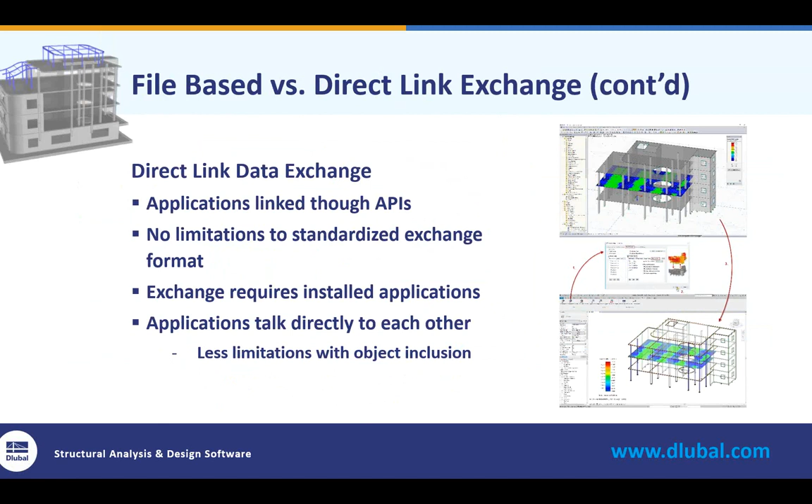With this option, the applications talk directly to each other, so we're going to see a lot less limitations with object inclusion. Back to my previous example with nonlinear supports and load combinations, we can now code in that option through the API interface to keep this information available, so whether we're round tripping between the programs, we'll never lose that information, even if it isn't necessarily included in the program we're interfacing with.

This leads us to the Dlubal Revit link and the import-export options available. I want to first note that this does utilize direct integration with API, so again we're going to see a lot less data loss than with a data file format. This option is included in RFEM. For those not familiar with our programs, we operate with an add-on module system. RFEM is our main program, providing us with a full analysis, and our add-on modules are utilized for design or dynamics. The import-export options with the Revit link are all included in the main program at no additional cost. The ability to integrate between the two programs is bidirectional, so we can update all or only part of the structure and continue to cycle between both programs continuously.

You can transfer the structure objects. From our dialog box to import/export in Revit directly, we have the ability to turn these objects on or off. We also have the ability for the transfer of loads and load combinations. In our next tab, the structural settings, you again see the ability to turn on and off those load cases, load combinations, and result combination options.

Lastly, with regards to result sharing, we have the ability to export the RFEM results to Revit. This includes both members and surfaces, so we're going to see information available for deformations, internal forces for those members and surfaces, and reinforcement, for example. We've had the ability for a while to transfer reinforcement of surfaces, whether that's walls, elevated slabs, or slab on grades for concrete design from RFEM to Revit.

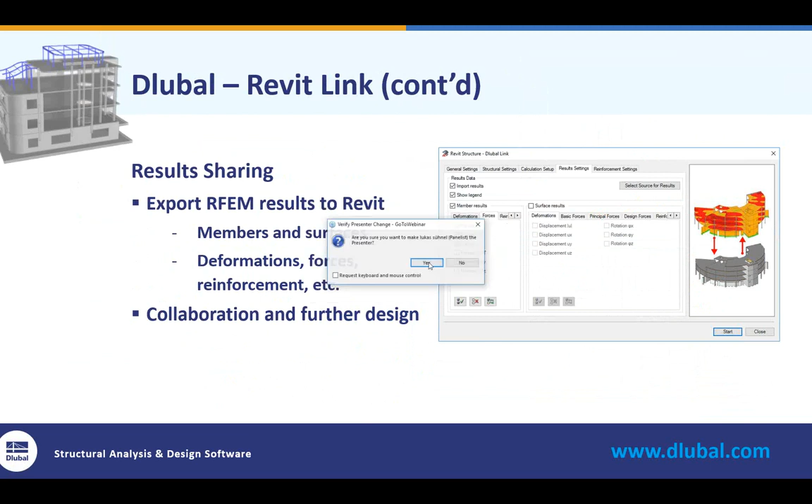Okay, thank you very much, Amy, for the introduction and the overview. I think you should be able to see my screen, and yeah, should be possible. Hello also from my side. In the next 45 minutes, I would like to show you the interface in action, and during that I would like to highlight a few different scenarios Amy already mentioned.

The first scenario will be one where we have a structure ready in Revit, and we want to export the data from Revit into an empty RFEM model. Therefore, I would like to show you now the Revit structure.

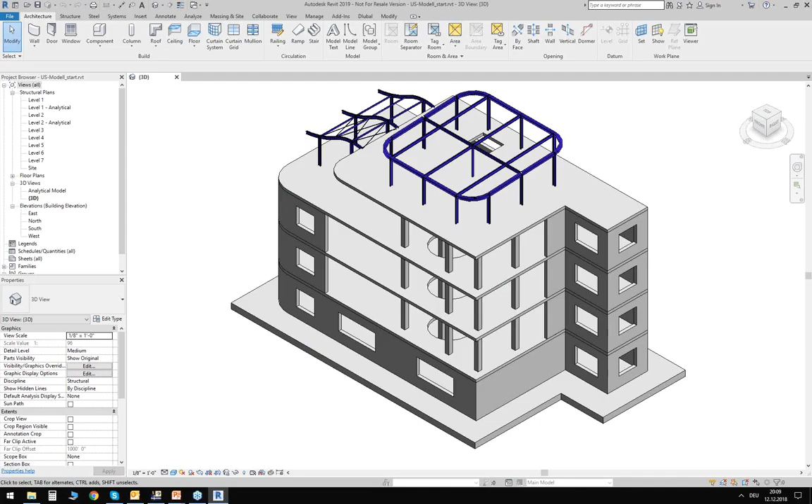Maybe as a side information, I'm using here Revit 2019. We do, however, support the interface down to Revit 2016.

Regarding the structure itself, I have here a mixed structure made of concrete and steel. I have a foundation slab, I have some walls with openings, I have curved walls, as you can see here in the corner. I have slabs with openings, concrete columns, and two steel constructions on top. The one on the left side has a curved roof shape, and the one on top has a sloped roof shape.

What you cannot see here right now in this Revit model, or what I did not include, is basically everything apart from the static relevant objects - things like heating, cooling, ventilation, electrical systems, or any kind of building services. You can have all those things inside the Revit model, of course, they're just not important when it's about showing the interface to RFEM. Important for the interface is the analytical model in Revit, and how you can get this analytical model I will show you now.

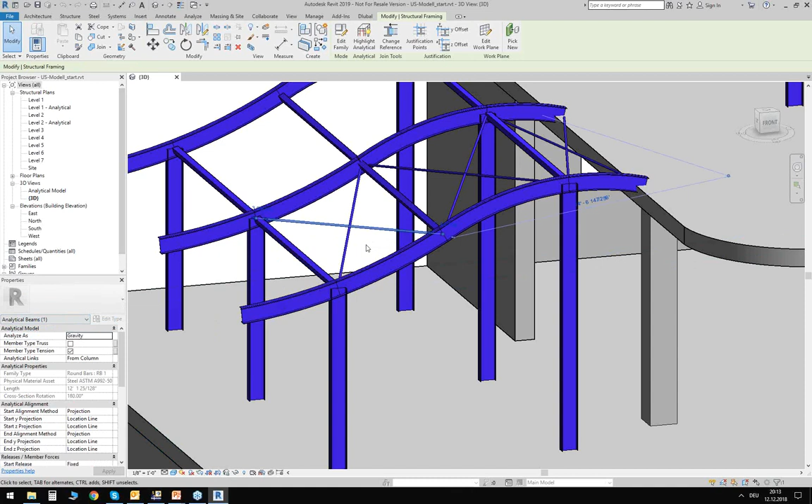So for example, we have here as well the analytical alignment of the member axis, but we also have an option to define member end releases in Revit. Additionally, and this is now a little bit Dlubal specific, it's Dlubal parameters that I activated in advance. I have here an option to define this analytical member as a member type truss. Or for my bracing here, I can define it as a member type tension. This is information which we can exchange with RFEM or with RSTAB, and I will explain it afterwards again.

Okay, so by activating the analytical model for each of those elements, you can create the global analytical model. And this you can also, of course, see in Revit. Revit has a predefined 3D view, which we can activate. So again, this is the analytical model. This is what we will export afterwards to RFEM. And you can see what I just mentioned. The foundation slab is now a 2D surface. Also, the members in general are now just 1D elements.

So in general, I think it's clear that when we export the analytical model, the geometry is quite clear. It's fixed, clearly defined by the length and the height of the elements. What's maybe not so clear is the exchange of information. And with information, I mean the exchange, for example, of the material names, of the cross-section names, and so on. I think in general, you can imagine that the material names in Revit are maybe different to the name of the material in RFEM. So how you write the name can be different.

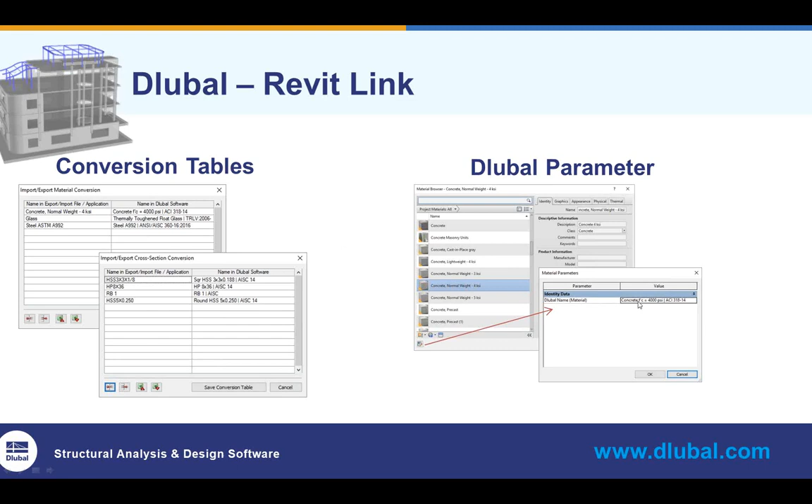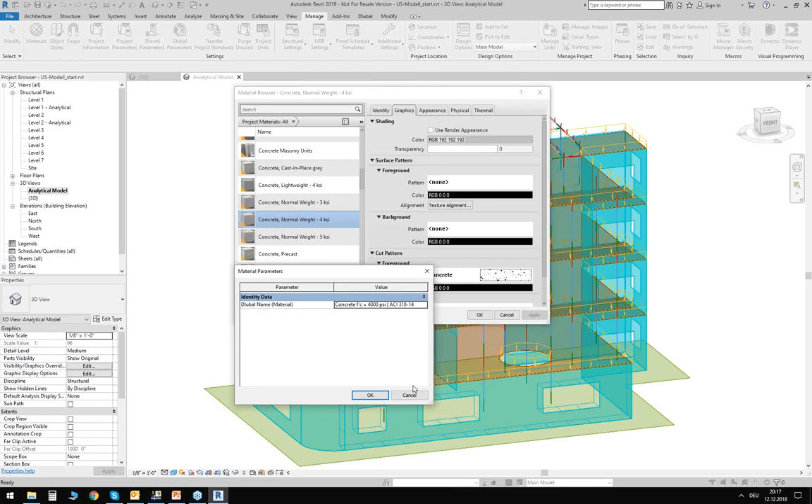The other possibility to link this information is via Dlubal parameters. So you can define directly in Revit the name of the material in Dlubal. This is also something which I can show you in my Revit model here, because I actually did it that way. As I just said, I'm using this material in my Revit model, and via these custom parameters in that window, I was able to enter the name of my Dlubal material. So instead of exporting this name to RFEM, we will export this name. And since this is the name of the material from the RFEM library, we will get the correct material parameters and the correct values for the design which we have to do afterwards.

Okay. Apart from that, we can also see some loads inside this analytical model. So we see here that there are some loads assigned to my members. So Revit gives me the possibility to define load cases, load combinations, and even loads. You can access this information via the Analyze tab, and you can click here on the load cases, and you can see we have here 4 load cases for the dead loads, live loads, wind loads, and snow loads.

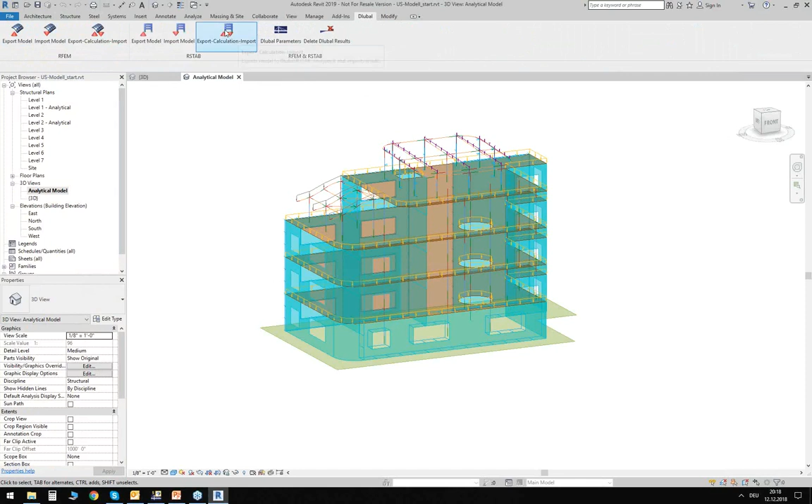And all this information I can now export to RFEM. And I think this is something we could do right now. So how can I do it? First of all, I will show you my empty RFEM. There's nothing inside. And I can start the export from Revit. So I have here a Dlubal tab. And I have here options to export and import between RFEM, export and import to RSTAB.

And here I have some additional buttons. Here, for example, the one which we call Dlubal parameters. This is what I just explained. We have parameters for the materials, for the cross sections, for these special member types. Here you can activate these parameters in Revit, so you can access them here in these windows.

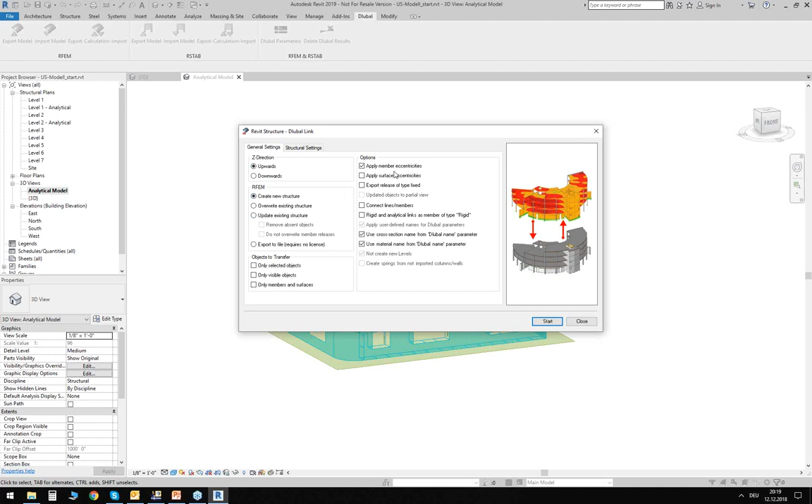So I want to export my model to RFEM. Therefore, I export this model. I can define some detailed settings for the export. I can define the Z direction of my RFEM model. It should go upwards. I want to create a new structure in RFEM. I want to apply some eccentricities that I have here inside my Revit model. And I also want to use these cross-section and material parameters that I just defined. Additional to that, I can also export my loads.

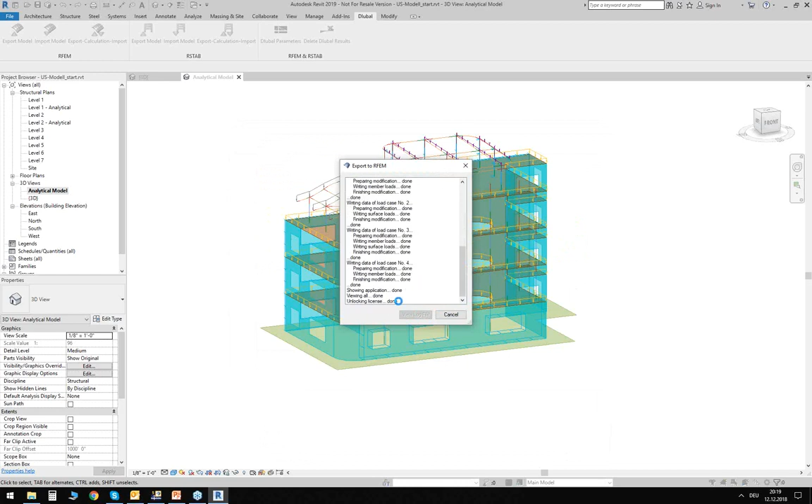I can run the export. And you will see that it's quite quick. Yeah, the export is already done. So I can close this window. I can open RFEM again. And you can see directly that the structure we receive here on this end looks quite similar to the one in Revit.

We have the foundation slab as a 2D surface, of course, including some supports. We have our walls with the openings. We have this curved wall here on the edge or in the corner. We have concrete columns. We have steel constructions here on top, the one on the left with the curved roof shape, the one on the top with the sloped roof shape. Yeah, looks quite good in general.

But if you exchange data, you always want to make sure that you exchanged the data correctly. So we should have a detailed look at this data. And there are different ways how to do it, and I would like to show one way: by using the display navigator here on the left side. And here I have an option to render my objects according to different colors. So for example, I can render my structure according to my materials. We haven't seen any difference now because it's basically the default rendering option.

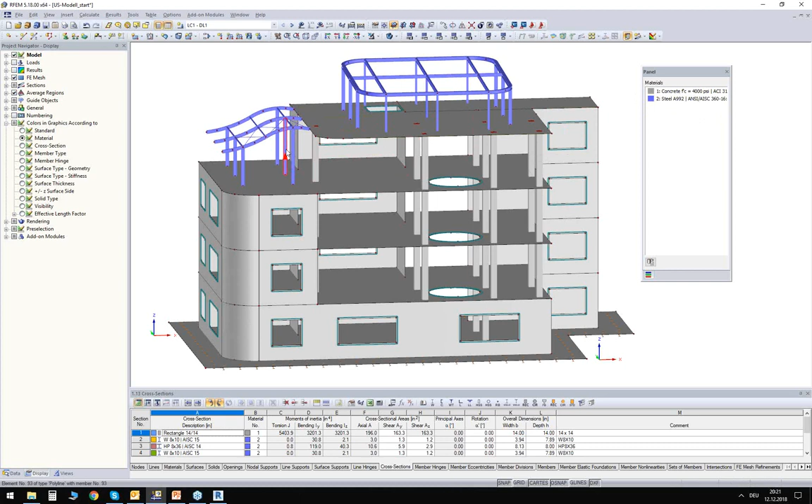What we can see here is that every gray element is basically made of concrete and every blue element is basically made of steel. We will see an effect if I change it to rendering according to cross sections. Yeah, thank you. We see here that the cross sections are now colored, and the color represents a specific cross section. So this allows us to get a nice overview about the structure and the exported sections from Revit.

We have further options here, for example, the member type. This is something I wanted to explain again. You can see here that we have different member types. We have member type beam, truss, and tension. And this is what I defined in Revit before. We said the coupling member should be a truss member. And we also said that this bracing should be a tension member.

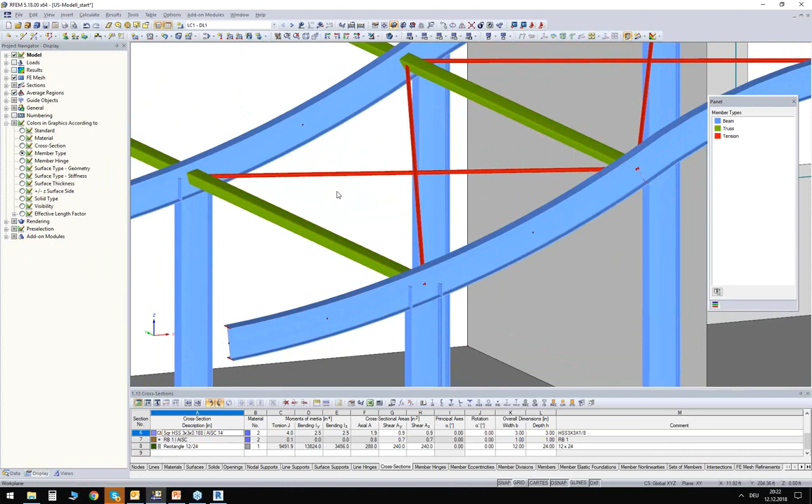And this is advanced information for RFEM. This basically means a truss member is a member with hinges at the beginning and the end, and a tension member is a truss member plus a nonlinearity assigned so that it should fail under compression. So this is additional or advanced information that you can exchange between Revit and RFEM, or Dlubal in general.

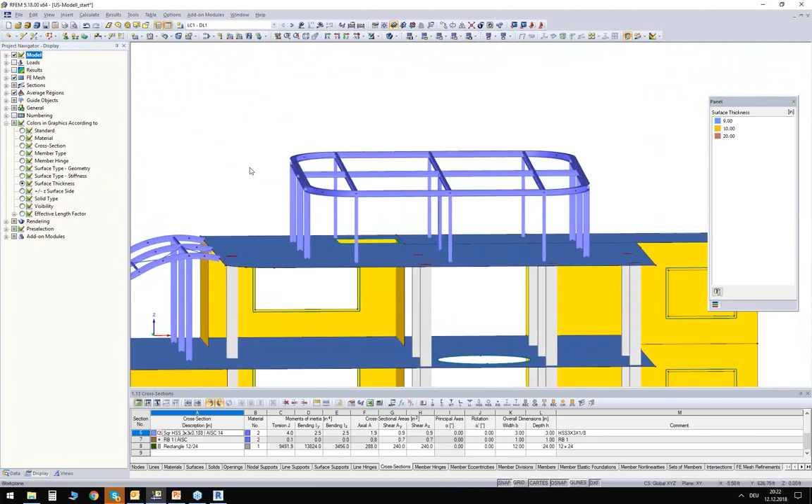Okay, there are further options, for example, the rendering according to surface thicknesses and so on. And there's one which I also want to show you. It's according to member hinges. What you can see here is that there's no color included in this graphic. That tells me that there is no hinge included. So I have no member hinges here in this structure.

What that means is that every connection here in the steel construction is a rigid connection. And as a structural engineer, this is something you want to avoid. And of course, we can add these member hinges here in RFEM as well. So what I'm going to do now is the following. I will define one type of member hinge. In that type, I want to release the rotations around the Y and the Z axis.

And now I can assign this member hinge graphically to my RFEM model. Assign graphically to members. The only thing I have to do here right now is selecting these members. Depending if I select the end or the start or the center of the beam, I will apply this member hinge to the end, start, or on both sides. Okay, let me just double check if I did it correctly. Yeah.

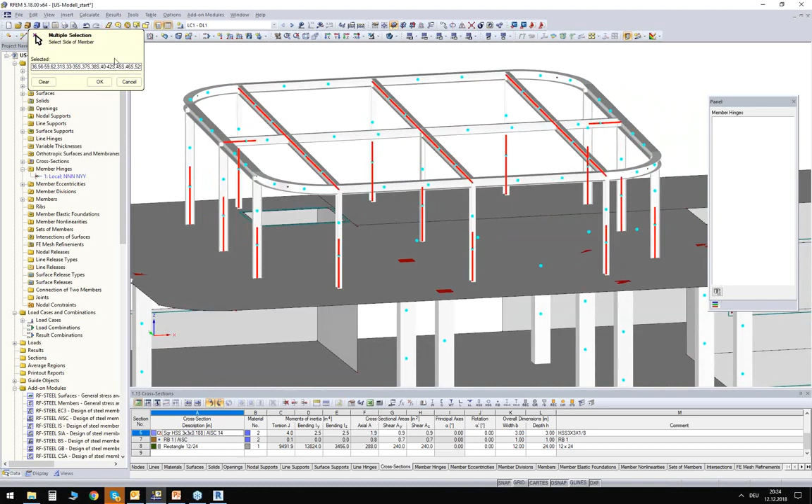I could even double check it by this graphic, which we have still activated. You can see now, I have one member hinge here, and the red color will show me on which side of the beam I defined it. Okay. So with the display navigator, we can double check, for example, the imported data. We assume the model data is now correct. So I want to continue with my loads.

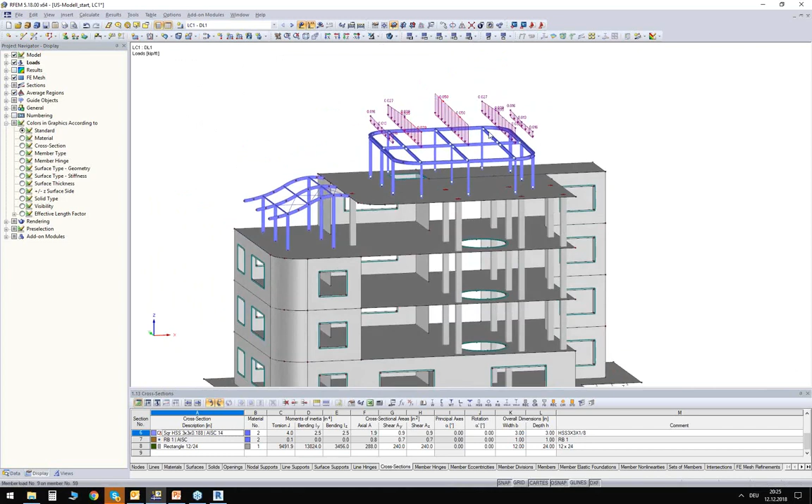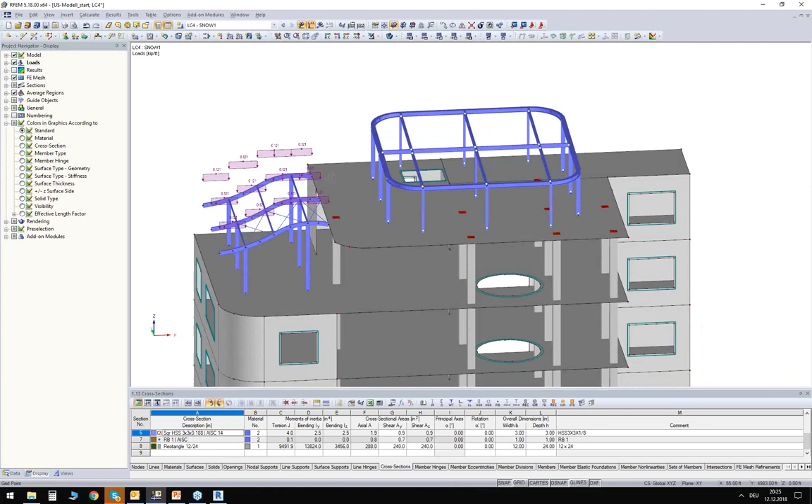I have here 4 load cases. These are the 4 load cases I expected to have because I exported them from Revit. And I can also take a detailed look. I have some dead loads, additional dead loads. In this load case, I have some live loads here on top of the slabs. I have some wind loads and also some snow loads. I can see directly that the person who created the loads in Revit forgot the snow loads, for example, here on this steel construction. Again, this is something I can, of course, also add in RFEM.

Therefore, I'm going to use a small generator. I will generate some loads from area loads on members via plane. So I'm defining the magnitude of these loads, 0.02 KSF. They should be related to the global projected area. And I can pick the corner nodes of my area where they should act. I will simplify it a little bit here for the presentation, just so we save a little bit of time. So I'm picking these corner nodes and I'm cutting a few edges, I know, but yeah, should be okay for now.

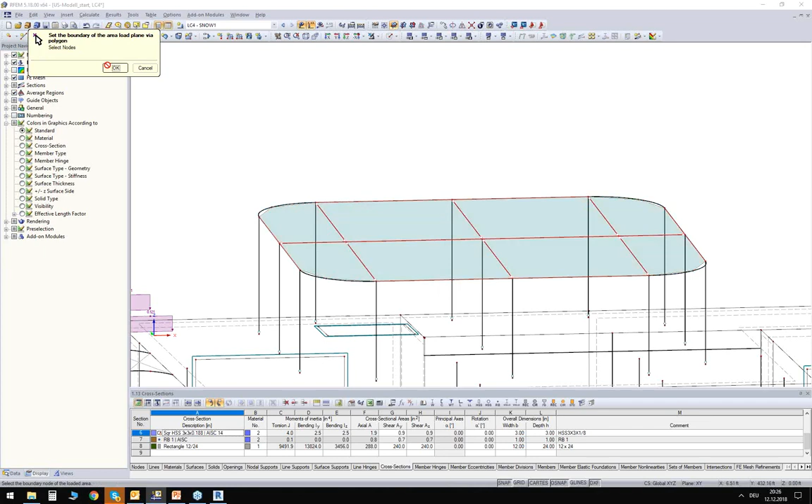I want to remove the influence from all horizontal members because I want the load to be applied only on the slope beams. Okay. So this is what I receive. After I did that, I can see my area load. I can also change the display and display it separately as member loads. The intelligence of that generated load is still active, as you can see. So it's still a generated load. And this is an advantage for something I will show you afterwards.

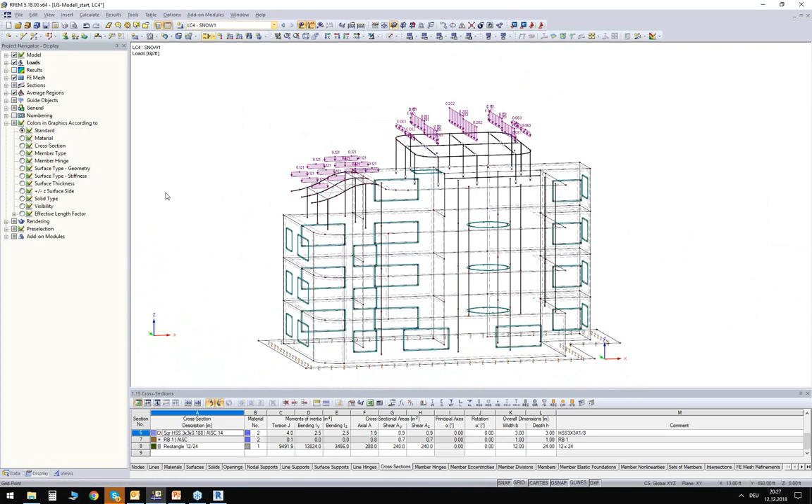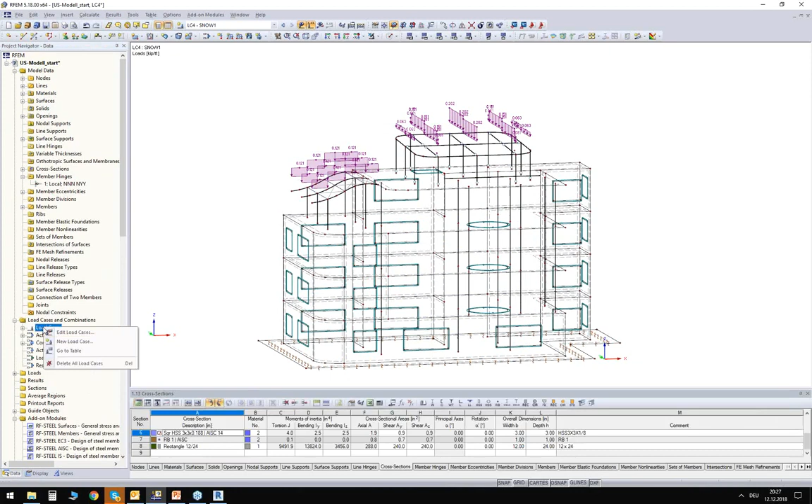Okay. I don't want to deal with the loads any longer. For now, it should be okay. So the next step would be the combination of these load cases. This is something I can do in RFEM as well. I go to my general data. I will enable the automatic combination of load cases according to the ASCE code, and yeah, create load combinations automatically. I want to control this automatic load combination a little bit. Therefore, I'm checking the related tables.

First of all, I want to make sure that the correct action category is used for every load case, which is the case here. In case we would have multiple load cases in the same action type, so in case we would have multiple wind load cases, for example, I could control here in that area that they should act simultaneously or alternatively or in groups or whatever.

Another important piece of information which we have to give to this automatic combination is according to which design situation it should create these combinations. So there is the LRFD section, the ASD section, extraordinary, structural integrity, and so on. And every design situation has its own rules for how you have to combine load cases, which you can see here. These are the rules according to the LRFD. These are the rules according to the ASD. You have different factors here and a different setup in general.

And depending which design situation you create here, you will have additional load combinations, of course. I want to save a little bit of time, so I'm deactivating the ASD combination. I only want to have combinations according to LRFD.

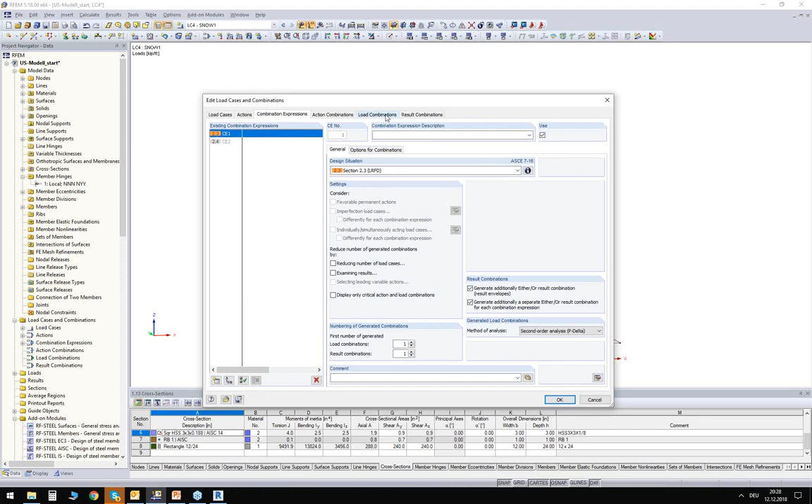I will create these combinations here. I can have a look at them again. I can see the factors, so I can control it or double check it. Additional to this, I get a result combination. A result combination is like an envelope for all load combinations. If you take a look at the results of a result combination, it will show you the maximum and the minimum and its related internal forces. Okay. You can switch between the load combinations via this drop-down menu.

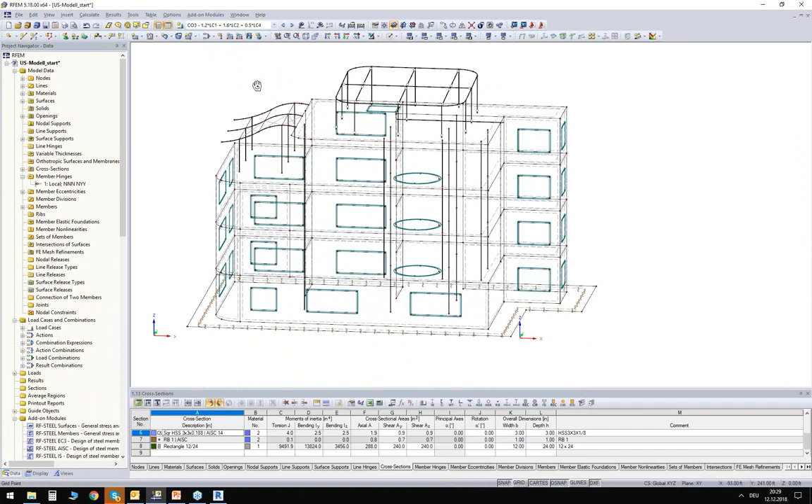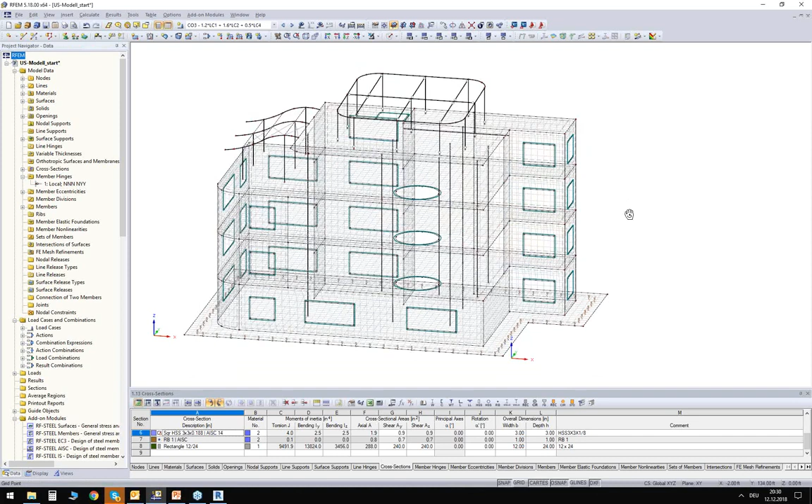So before we run the calculation, we should have at least a rough look at the finite element mesh. It's a finite element analysis here, so the finite element mesh has a huge effect. So what I will do is I go to my FE mesh settings and I will only define the target length of my finite elements. This is the most important information for now. I will regenerate the mesh and I can see the finite element mesh now.

In general, you could say it looks quite good. I mean, it's decent. There are some areas where it's maybe not so optimal. For example, here on the right side, where I have these openings, the windows inside, I have just two elements between the edge and the opening. This is not enough elements. So I want to optimize that area. Let's say just this area here. How can I do this?

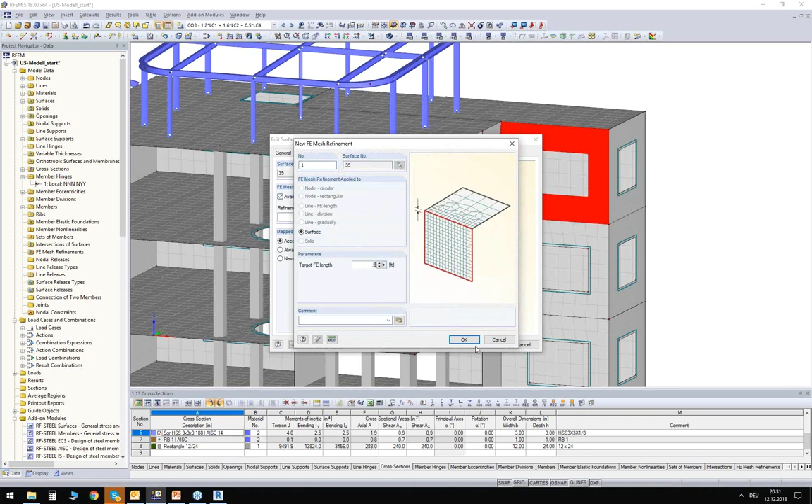I just double click on the surface. I can go to my FE mesh tab and activate a FE mesh refinement. The only info I have to give here is the target length of my finite elements in that area, maybe 0.5 foot. I accept and optimize that also on lines or on nodes. I will do it also for the node here. So around this node, I want to have an FE mesh refinement. I go to the tab, I activate the FE mesh refinement, and I can define additional information about the radius and the target length inside.

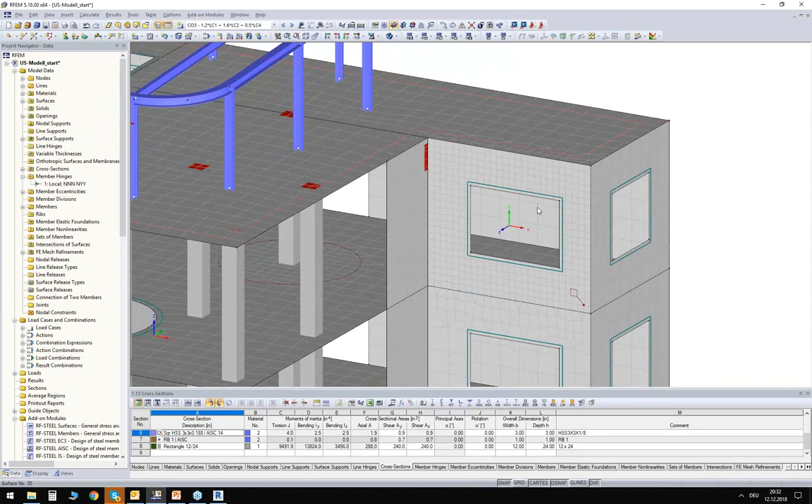Okay, we assume we optimized the FE mesh of the structure for every section. I will skip it here right now, and we regenerate the FE mesh. You can clearly see the effect now. So this is the global FE mesh. This is the refined FE mesh. You can see the effect as well here around the column. It was quite easy to change that.

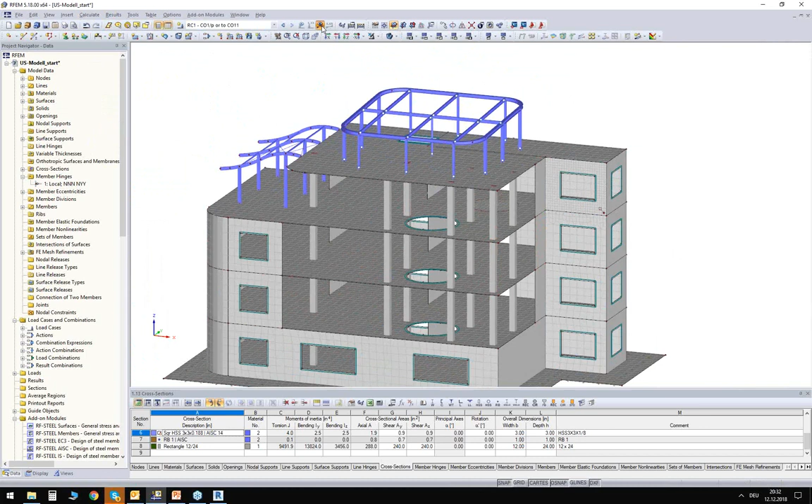Okay. So the next step is the calculation of the internal forces. I will do it by selecting my result combination here, and I will say, please show me the results of this result combination. I could have also done it in a different way. I could have clicked on the button calculate everything. But what does it mean? It will calculate also the results of my load cases. But I'm not really interested in the display of internal forces of my wind load case where there is no self-weight acting. So to save a little bit of time, I just clicked on the results of this result combination, and the program is intelligent enough to calculate only the required load combinations.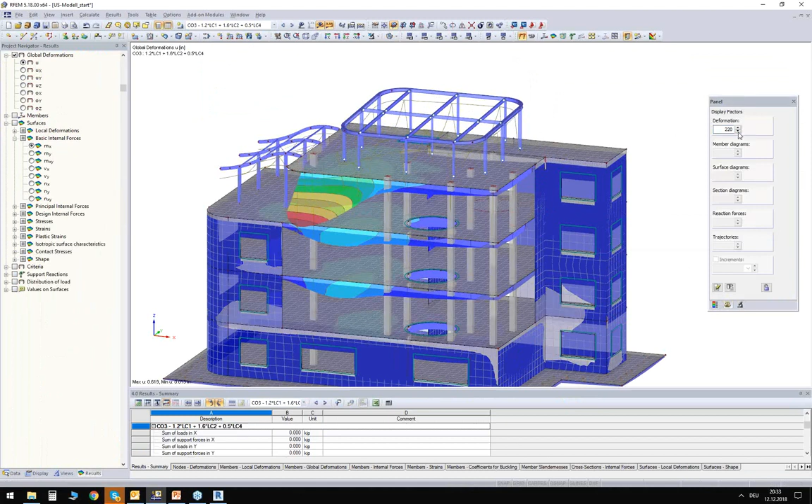Okay, we will see the results in a few seconds. And then we can continue with the design of the structure. For some reason, it takes a little bit longer than when I prepared it, but that's okay. Okay, the calculation finished, we will see the results in a second. And I can switch now again between my combinations and display for each combination my result. Let me decrease a little bit the display factor, otherwise it looks like the structure is failing.

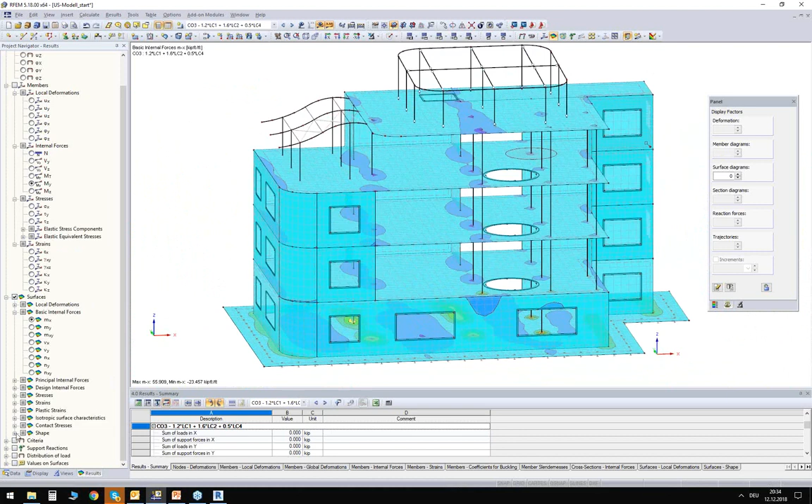On the left side, I have my result navigator now. I can switch between deformations or member internal forces. So for example, you can see really nicely that the axial force in the columns will be increased every time it intersects with a slab, of course. I can also display some bending moments, maybe to double check if the hinges I defined work correctly. I can, of course, also take a look at the results in my surfaces, maybe some bending moments in my surfaces, or even the contact stresses on the foundation plate on the bottom.

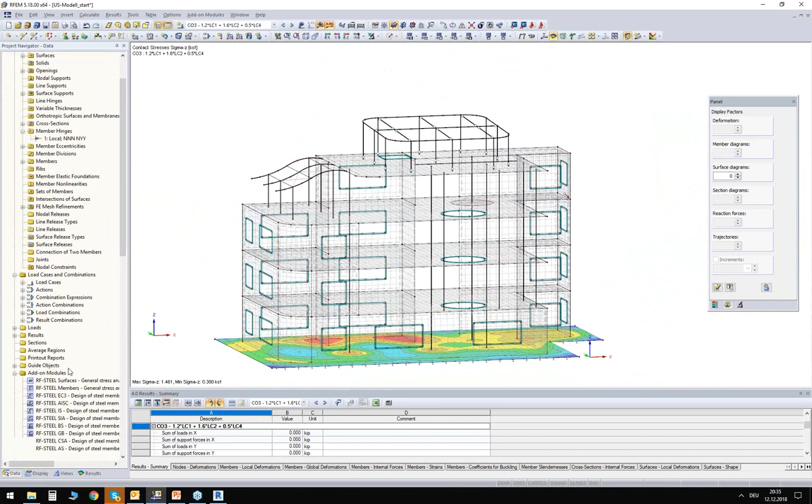You'll notice every module looks familiar, so if you can handle one module, you most likely can handle the others in general. What I have to do is select the members I want to design—here just this beam and this column. You can pick the code you want to design according to, and also the result combination.

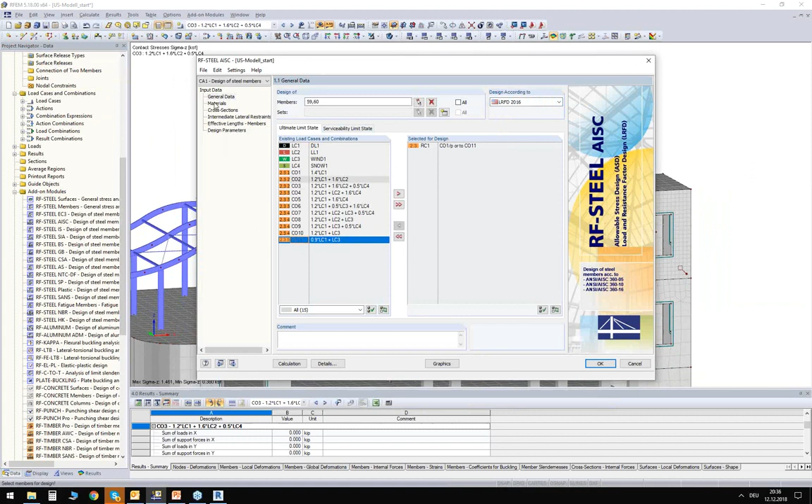You have additional windows to go through. Some give an overview of properties for materials or cross sections. Other windows deal with stability checks of the beams, so you can define intermediate lateral restraints, buckling lengths, and design parameters. I'll leave those values on default.

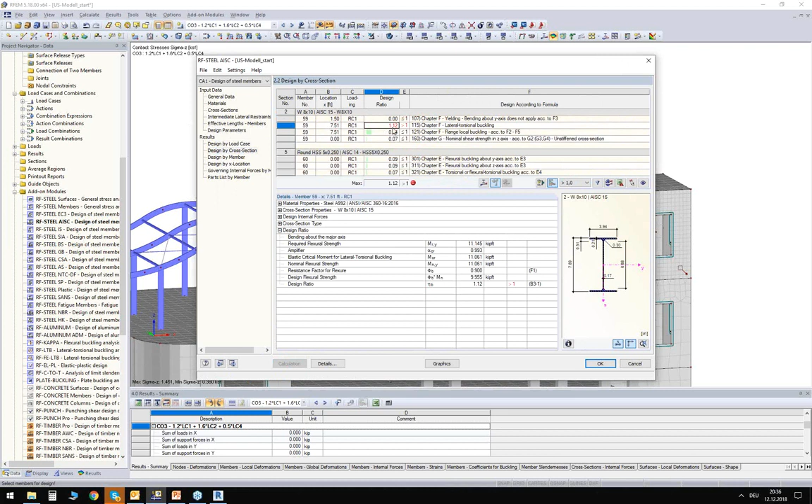I'll run the calculation and switch to my result table, design by cross section. What I see here is, for each cross section designed, the maximum checks. I notice the W section for the beam has a design ratio of about 1.12, higher than 1, which is not good. The design ratio of my column, on the other hand, is not even at 10%. So I have to optimize both cross sections somehow.

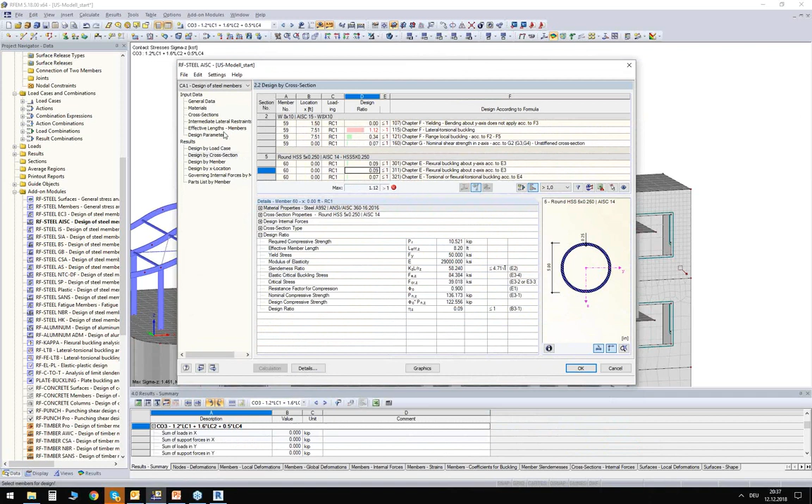I can do it the following way: go to the cross section window and let the module optimize the pipe section automatically from the current row. Current row basically means it will look for the best section in this list—the best section being where the design ratio is smaller than 1. The criteria for this optimization is actually the self-weight of the section.

Okay wait, I made a small mistake, sorry—import cross-section from RFEM, I changed it which I didn't want to. I want to optimize the cross-section, and I could in general do the same for the W section, but due to constructive reasons, I'm not able to change that section.

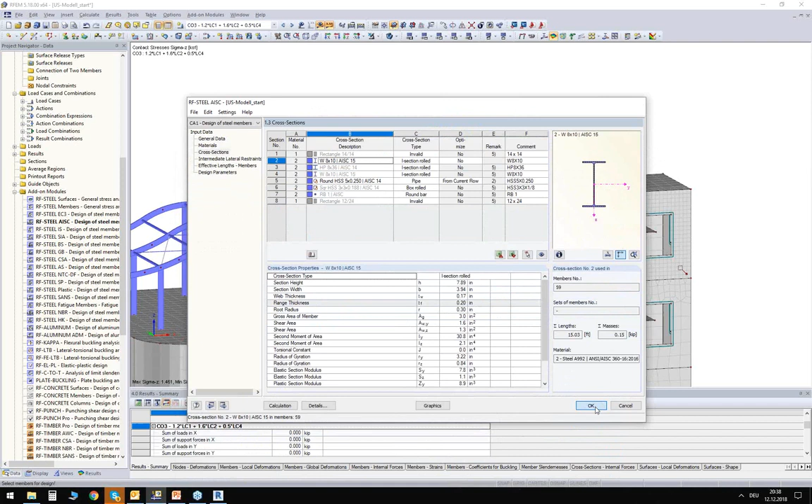So what I'm going to do is apply additional beams in my roof. I just select the beams and use drag and drop to copy them—it's a graphical tool to copy beams, really quick and easy. By defining additional beams, I will spread the load, and this is something I want to show.

If you remember, we defined this generated load where we specified the area it should act on. This load is intelligent enough to recognize these new members, and it will redistribute the area load to all beams now, all slope beams. This basically means the load on the beam we design will be reduced. So I go back to my module.

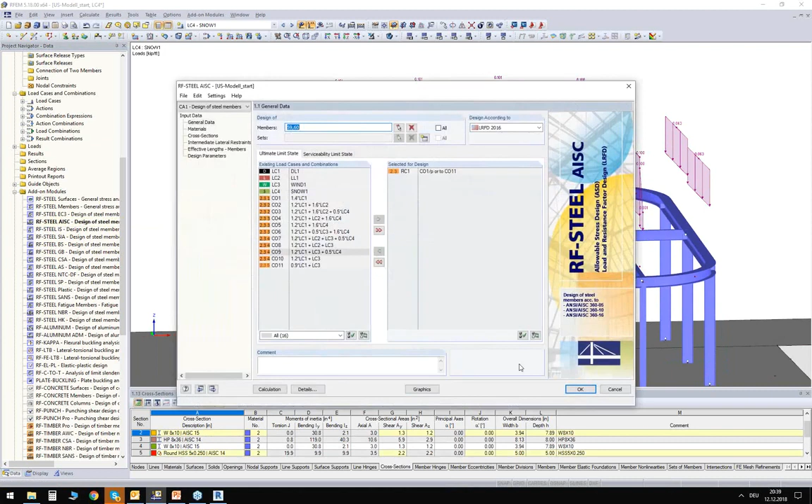I rerun the design—for the pipe section I'm using automatic optimization, and for this section I optimize the analytical structure in the background. I click calculate again. And of course I have to recalculate the internal forces now, simply because I changed the analytical model in the background—I added additional beams and redistributed my loads, so I have to rerun the analysis.

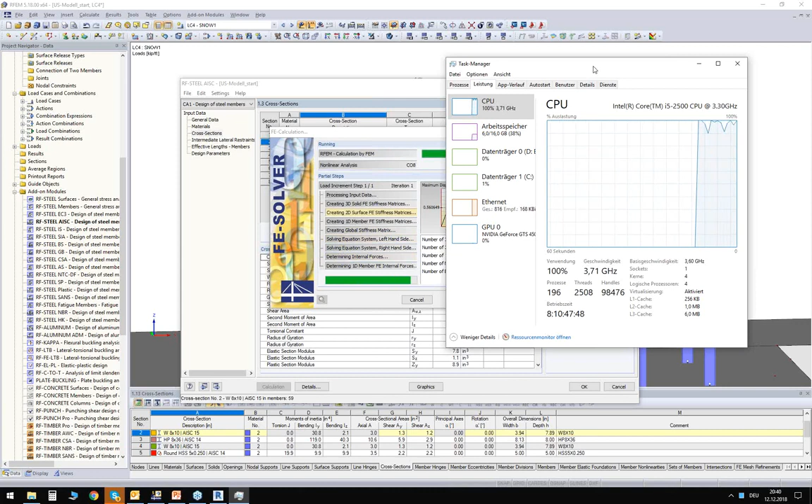Maybe some side information while we're recalculating this—something I can show you is the task manager. You can see I'm using more or less 100% of my CPU, meaning we're able to use all the physical cores from the processor. So in case you have good hardware, it will definitely benefit performance during the design or calculation here.

Okay, we have to wait a few seconds more and then I'm done with the design.

Okay, this should be the last one. We will see our result tables again. And in these result tables, we will see now that the design ratio of the W section is at 66%, which is fine. And the design ratio of my pipe section is at 94%, which is also fine.

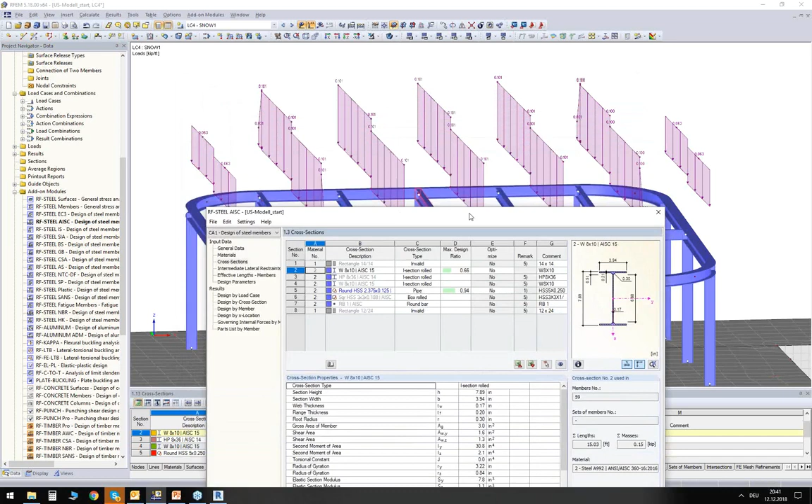So to make it 100% perfect, we would actually have to redesign everything because the design of my pipe section, this optimized pipe section, has been done with the internal forces of my original structure. So I would have to export this optimized cross section back to RFEM, recalculate my internal forces, and with these probably slightly different internal forces, rerun the design. I will skip this check right now, or this loop.

Of course, we are able to display the design ratios also graphically. I think this is no big question.

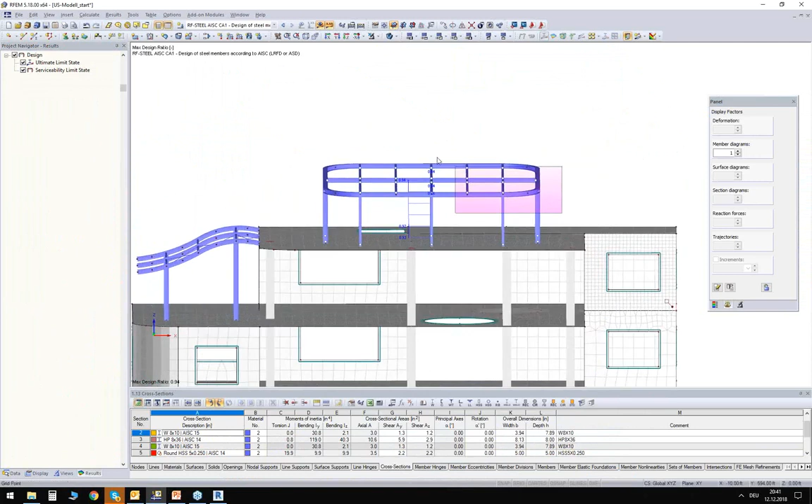Okay, so we just changed a lot of stuff in that top steel construction here. We added hinges, we changed the amount of beams, and this is maybe something which you would like to give back to the Revit model. So you want to update the Revit model with this information.

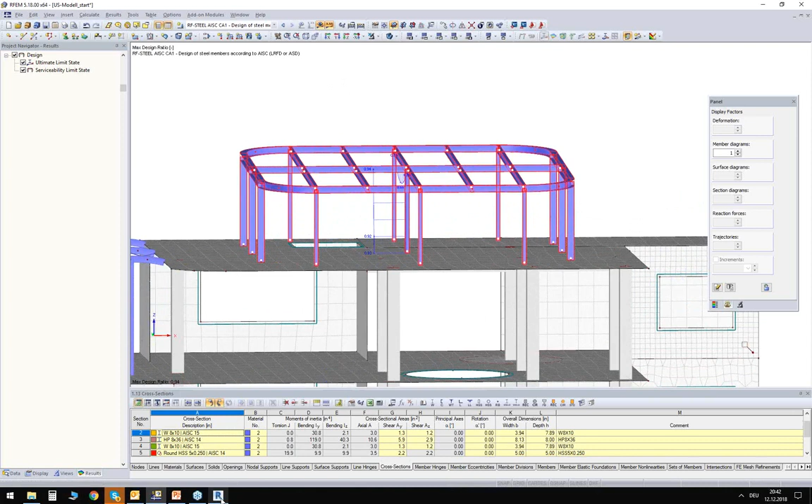And the way you can do it is the following. You go back to Revit and you run the import from RFEM. You update the existing structure. I don't want to consider any eccentricities right here, right now. I want to apply loads, that is okay. And I don't want to import any results right now, just update the physical model. So I can start the import and you can have a look at this area here.

Okay, so first of all, we get a message about an unsupported combination criterion. Basically, Revit tells me here that it cannot handle result combinations. It's not a big deal here.

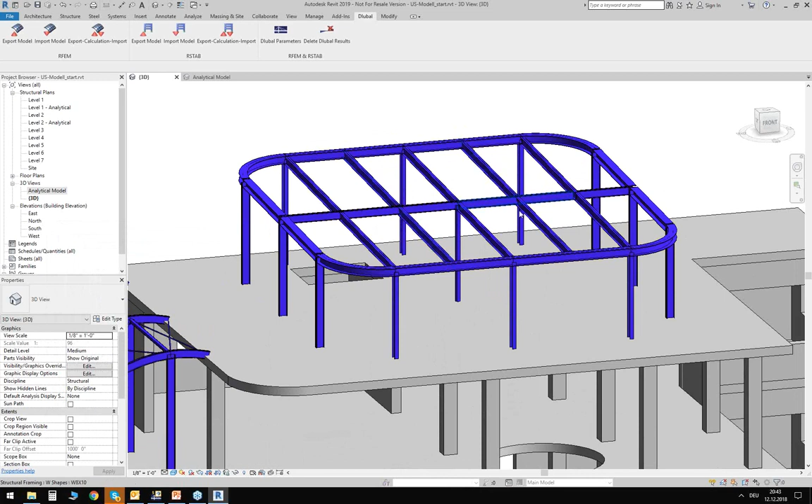Important is that we have now these additional beams in the roof, and we also have updated information in the analytical model. So you can see here in the properties that we have now also information about the hinges on the bottom of this column and also in the beams and everything. So we were able to update the analytical model in Revit, and we were also able to update the physical model. We added new beams here.

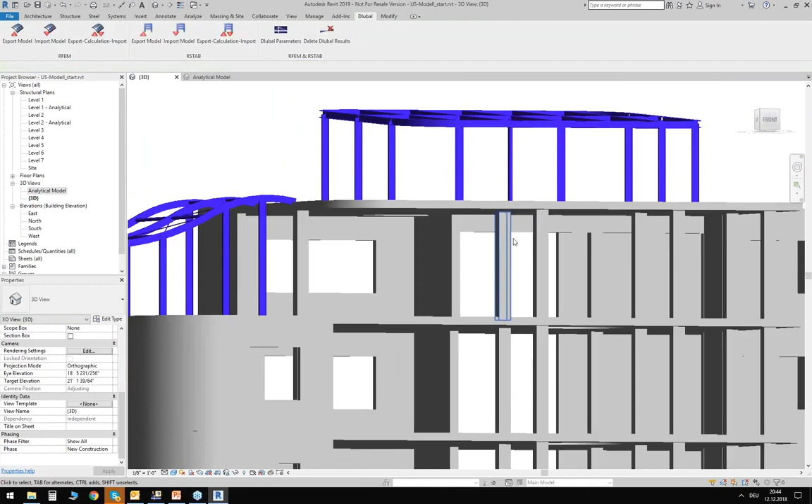Okay. The next thing that I want to show you is also the design of some concrete elements. So I want to design the columns, and also there's a beam inside, which I didn't show you before. I want to design these elements in RFEM and also export this result into Revit.

So I go back to RFEM, and to design these concrete elements, I need a different module. This module is called RF Concrete Members. And it looks familiar, you can already see it.

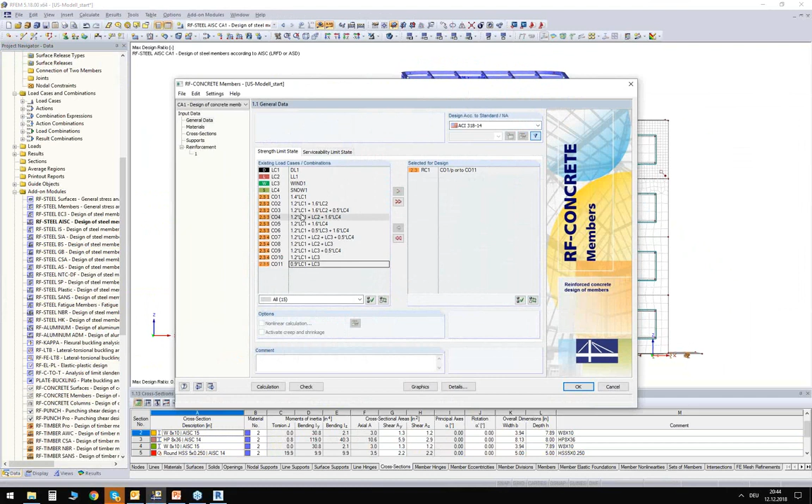You simply have to choose the design, the code you want to design the concrete members according to, and the load combination again, or the result combination in this case. And then you have additional windows for the material, for the cross section, reinforcement layout windows, so like which rebar, possible rebar you want to use, stirrups, the concrete cover, and so on. Again, Amy has some nice webinars about this module, which you can take a look at.

The only thing which I want to change here is the members I want to design. So I'm selecting here all the columns from the highest concrete level and also the beams here in the background.

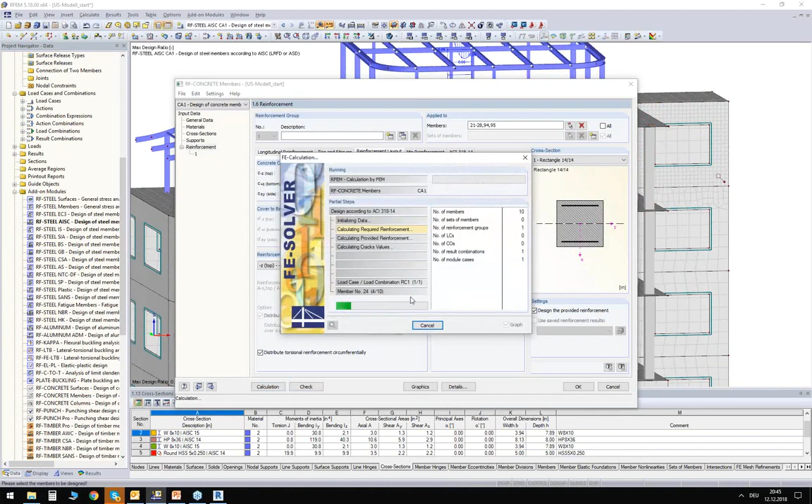Okay, I will run the calculation. Since I already have the results from my result combination, I only have to do the design of the beams, and it's quite quick. So I get now additional tables for my results.

I have here information about the required reinforcements on top, on the bottom layer of the section, for the shear, and so on. And this module also gives me a provided reinforcement.

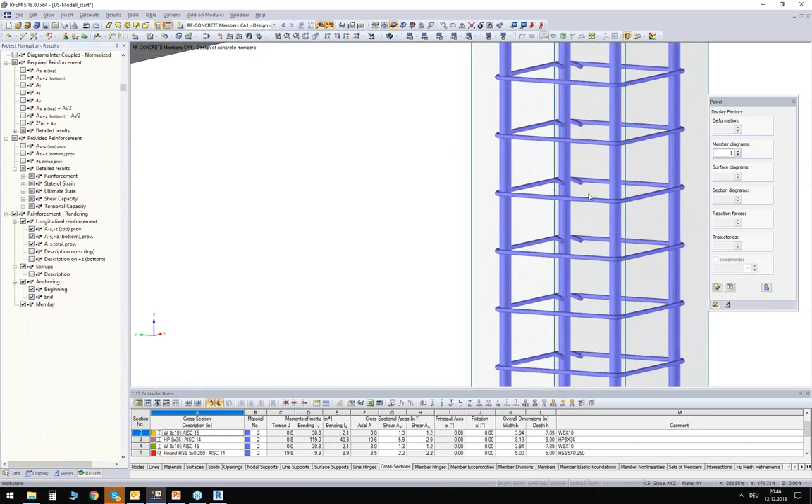So here I have some nice drawings, and I can also display this provided reinforcement in my RFEM structure. So I can choose here the concrete case, and I can display the results, and I can enable the reinforcement rendering. So I will zoom a little bit in, and you can see directly I display here now the rebars inside my concrete column.

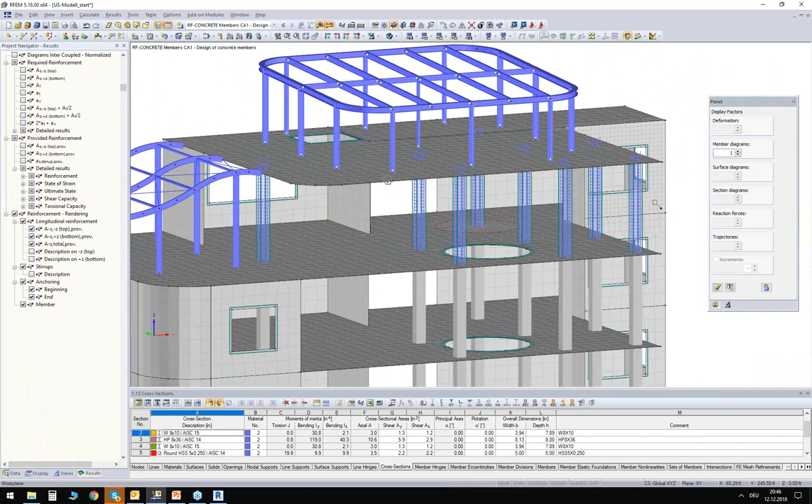And this is also working for beams, of course. Here you can see the stirrups and the longitudinal rebars in the beam, including the hooks. And this is also information you can export. This is a quite new feature. So I can go back to Revit.

I can import the model or import the results from RFEM. I will take a look at the settings here. I'm not interested in results, I'm interested in reinforcement settings. I want to import the reinforcement, not from surfaces, but from members, because I designed members here. And I can run the import.

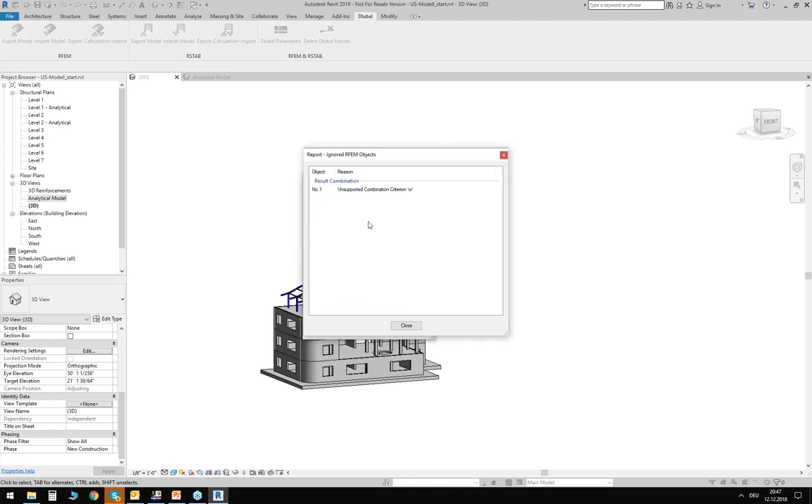So this is again the log, basically, which he will show us. And after the import, we do get the same message again. I don't care here in that moment. But we also get a new 3D view, and this is called 3D reinforcements.

By default, the reinforcements will be displayed as a wireframe model. If you switch up a few visibility settings in Revit, for example, change the visibility for the rebars in that specific view as unobscured object and view as solid, then you can also change a little bit the display of the structure.

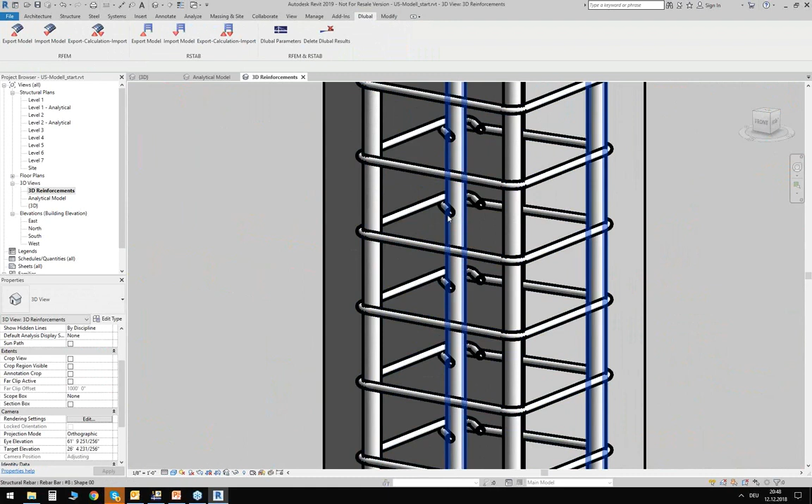You will see the rebars also in a nice solid model here in Revit. So you can see again the stirrups, you can see the longitudinal rebars in the columns, and also in your beam.

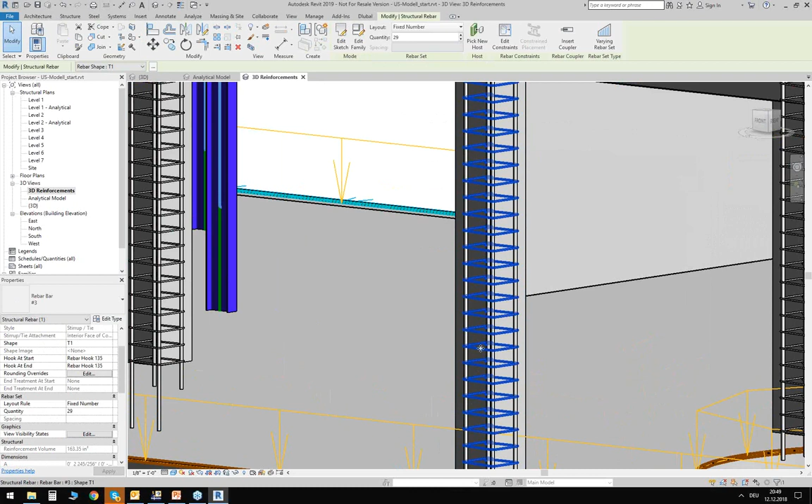And these are not simply graphical objects, this is actually a rebar. So if you click on this object, on the stirrups for the column, for example, you could change now the shape of the stirrup, you can change the hooks, you can change the quantity of stirrups in that column, and so on. So it's an actual object you can work with.

This would be the first scenario that I wanted to show you. So the exchange between RFEM and Revit, using the global model, the complete analytical model.

And you could theoretically continue here. You could change, update, or add additional things in Revit. You can update the RFEM model, you can design again the RFEM model, and export these newly found results or anything else back to Revit. So back and forth, and this is what Amy said, it's a bidirectional interface.

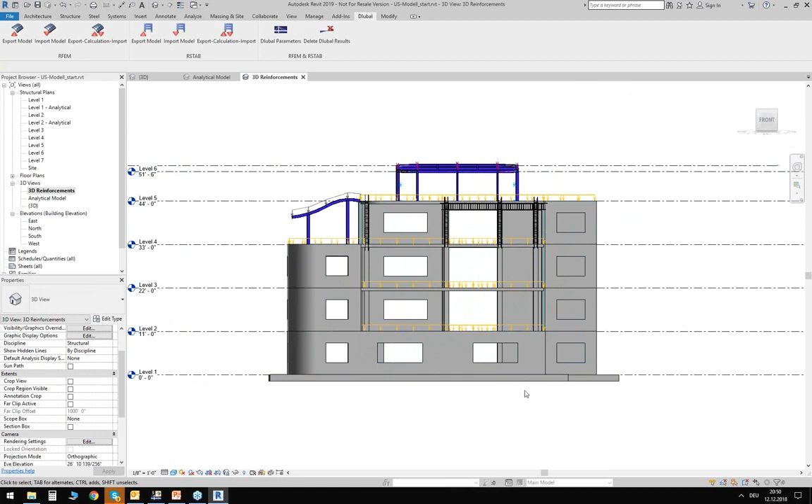But not in every situation you want to export the complete analytical model. It's not always required, and not every engineer actually wants to work with big 3D models. Some prefer to work with smaller models, or they want to design it level by level, for example. And this is something I would also like to show you.

You can export partial models from Revit to RFEM, and I did it in advance for this small structure here on top, for the steel structure. I can show you. So I have here this pavilion. It came from Revit, and I calculated and designed it, and I have some support forces down here.

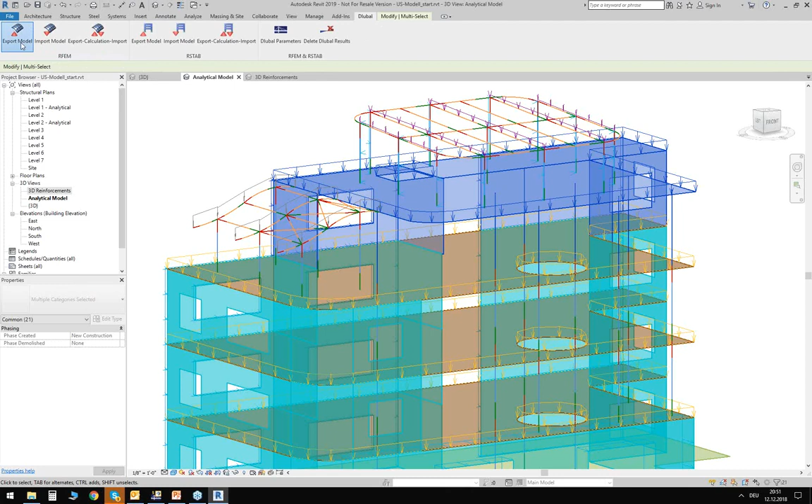And now I want to do it for the concrete structure below, so for the concrete walls, the concrete slab, and the concrete columns in that level. So I select those objects here in Revit, I go back to my Dlubal tab and say export model. I can create a new structure in RFEM, and export only the selected objects.

You can also do it via visibilities, but I prefer here selected objects. I want to apply my member eccentricities, use my Dlubal parameters again, and also apply the loads. So I run the export.

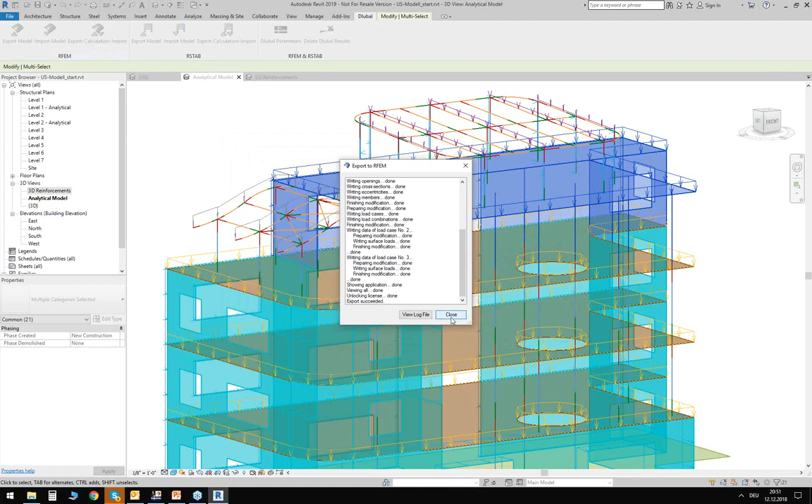It's done, I can go back to RFEM. You can see here this partial model from Revit, just the concrete elements from the top floor. And you can work with this, of course. You can support the columns with nodal supports, you can assign line supports onto the walls.

And we also imported the load cases from Revit. So we have here the live loads on top of the slab, we have some wind loads and so on. But we do miss now the loads from the structure which we have on top, the pavilion, the support forces.

But there is a nice tool in RFEM, you can call it up via the tools menu, import support reactions as loads. I will click on this option, choose here the file, the pavilion that I designed before. I can say please import the support reactions from all supported nodes from any load case that I calculated in there, for example load case 1, and please place these loads on top of my slab.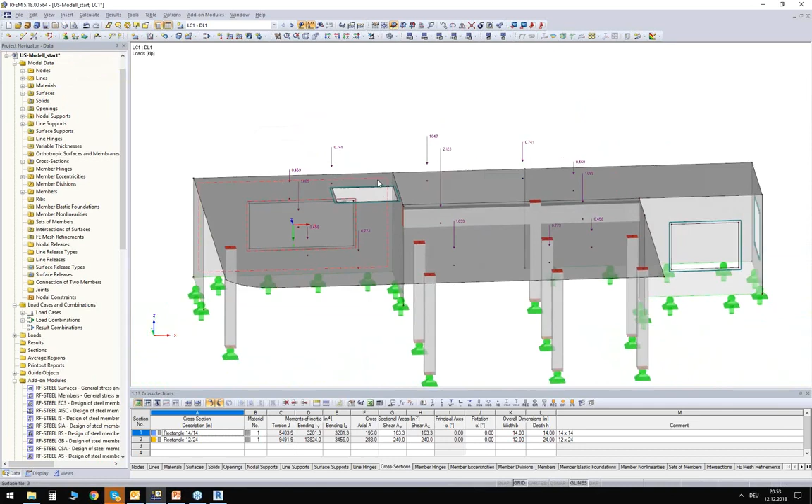Okay, you can see here now that we imported the support reactions from every column from the structure on top. Maybe you want to double check the values. We have here 2.1 kip, and if I go back to my pavilion, I can see this is the support reaction from my dead load case. With this workflow, you can actually import the support reactions from every load case from the structure on top.

And since we imported also the load combinations already, we can use it and redesign the structure. Maybe I can show that quickly. For the slab here, I can call up the module called RF Concrete Surfaces, to design concrete surfaces such as the slab or the wall.

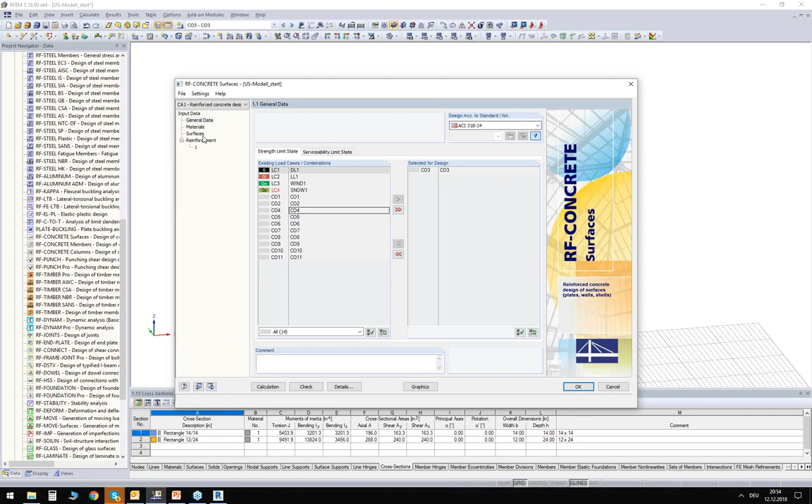Again, it looks familiar more or less. I will use here just combination 3 now, according to the ACI standard. I will tell this module, please design me now only this concrete surface here, the concrete slab, and calculate the required reinforcements for this. This is what it will do now.

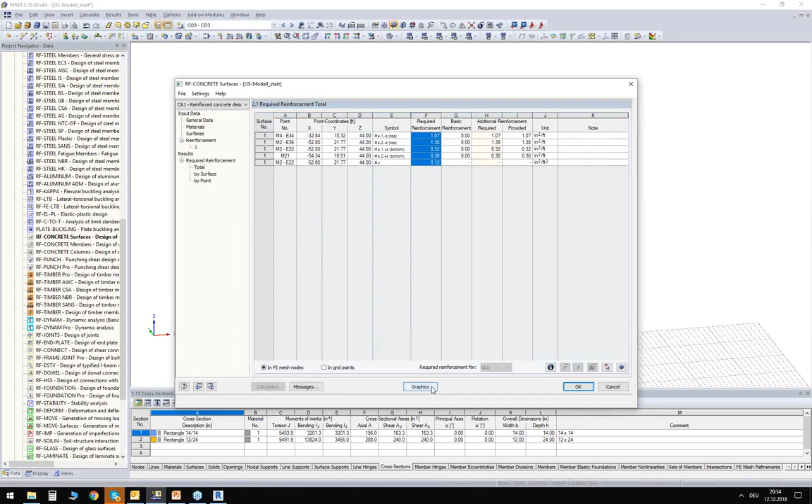I get now result tables with required reinforcement information, and I can display this also graphically, of course. So in my result navigator, I can display now the reinforcements on top, which is higher in the area of my columns, or the reinforcements on the bottom, which is of course higher between my supported nodes.

And these results I can also export back into my Revit model. So what I can do now is I can go back to Revit, I can import results. Let me just check a few settings here.

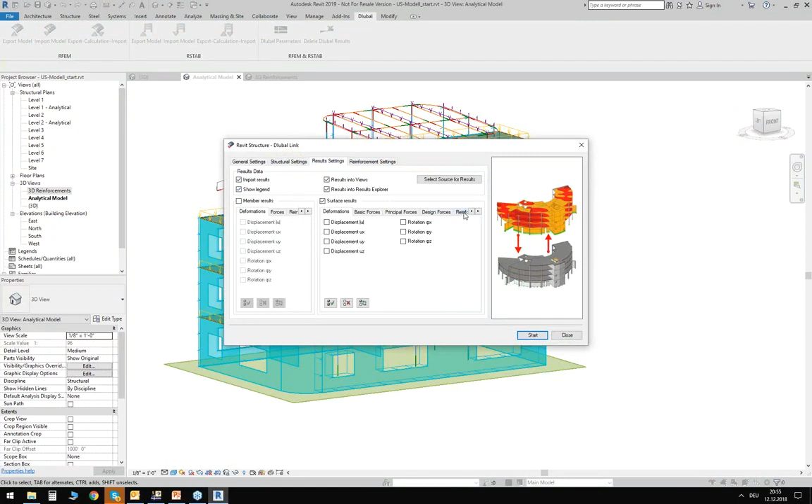So I want to import now results, result values from my concrete case. No reinforcements, because we didn't calculate any reinforcements there, we calculated required reinforcement values. So I import these values. I can click here on results from surfaces. Maybe all these results I want to import from the required reinforcement, and I can choose the source I want to import it from, which is this concrete case I just defined. Okay, I run the import.

And what I will get afterwards is a new 3D view here on the left-hand side. As you can see, I imported now the values into my Revit model, including this navigator here on the right, this color scheme on the right. I can even switch between my results, because this is now just the reinforcements on top in the slab.

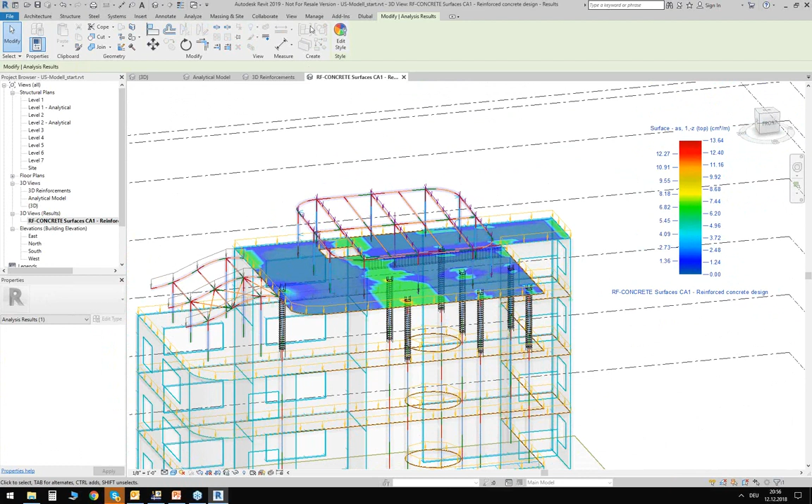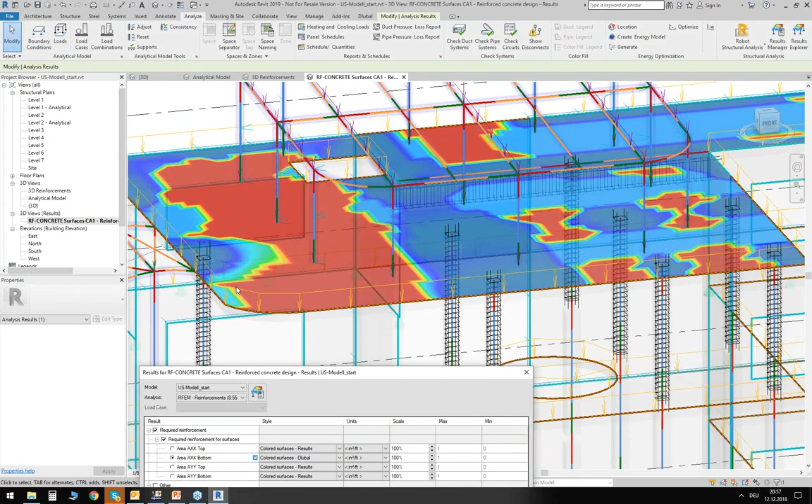But via a result explorer, I can even switch between my results in that view. So I can say, please display me also the reinforcement in the bottom of my surface. If I click on apply, this view will update, and I can see the bottom reinforcements in my slab. So this is something that we just saw in RFEM before, right? So we can not only import the rebars, we can also import result values from concrete modules, from internal forces, and so on.

Okay, so this was the second scenario that I wanted to show you, that you can work with partial models. You can extract partial models and also update again the global model in Revit. And the last scenario, which is even shorter to explain, is the following.

I will close every model that I have here in Revit, so there's no model open. I will also close a few models which I have here, so this one and the pavilion as well. It should only remain this global model that I imported before. And I can do also the following.

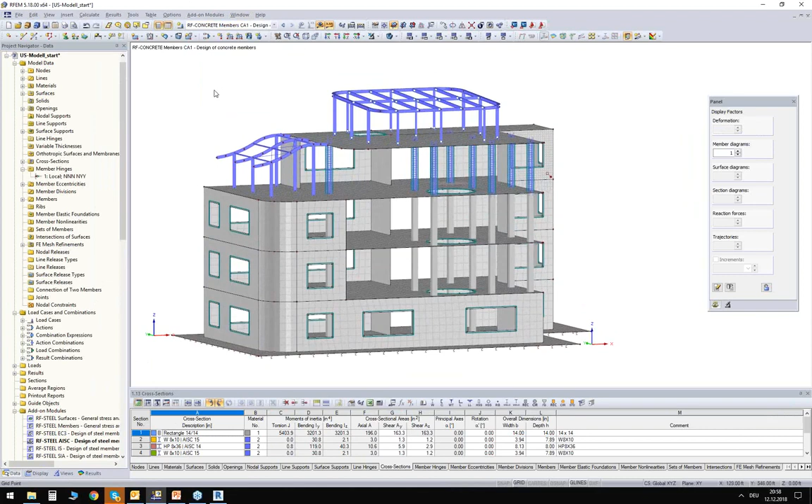Imagine there's a structural engineer who designed this mixed structure here, and there's an architect who has to create some drawings and whatever in Revit, and he's now requesting or asking for any information the structural engineer can give him about the structure. And the big benefit of this interface is that you can also export the analytical model in RFEM to Revit.

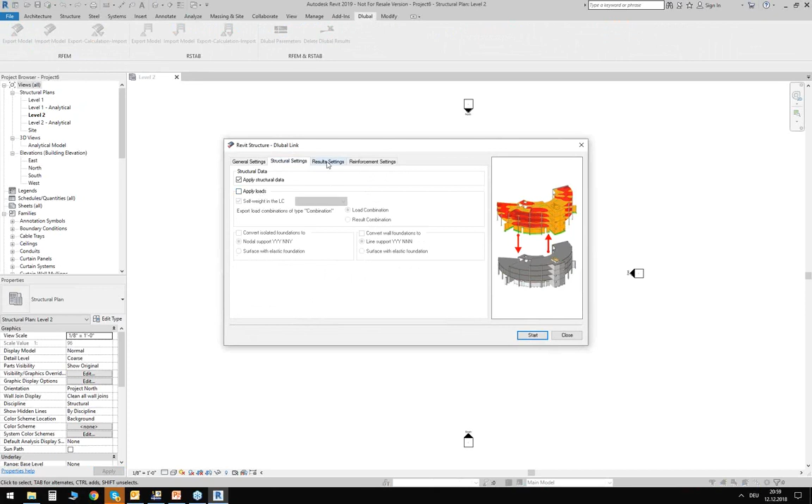So you can do it the following way. You create a new model in Revit, you pick any template you have here, and you go to the Dlubal tab, and you do what we just did before. We import the model from RFEM, and we apply member eccentricities. I skipped the loads - we could also import the loads, but I'm not doing it right now here. Trying to keep it simple, and I can run the import.

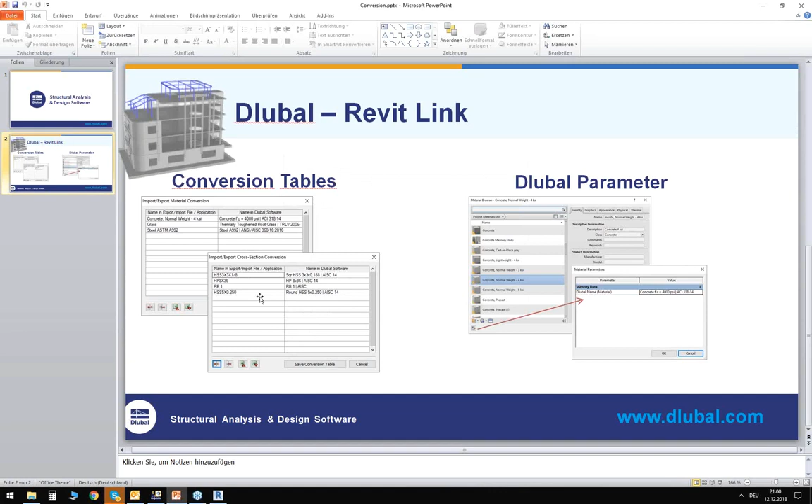And then the following could happen. It could be that Revit is asking you if you could assign a Revit type for this type of section here. So there's a column in RFEM, a round hollow core column, a pipe section, where Revit doesn't know how to deal with it. Now you could think we defined these conversion tables, and the information is actually inside: the Dlubal cross-section round HSS, and so on, should be the following section in Revit.

So what you would have to do in this case is load this cross-section from the Revit library. You can do this the following way. You click here on that arrow, you go to load family types. Then you can download some libraries from Autodesk directly, for example, the US Imperial libraries for structural columns made of steel. And here you will find this pipe section that we are looking for, 5 times 0.250. Wait, I'm too high. This section here, I can load it, and then I can apply this section.

The import is running now. I'm still running, by the way.

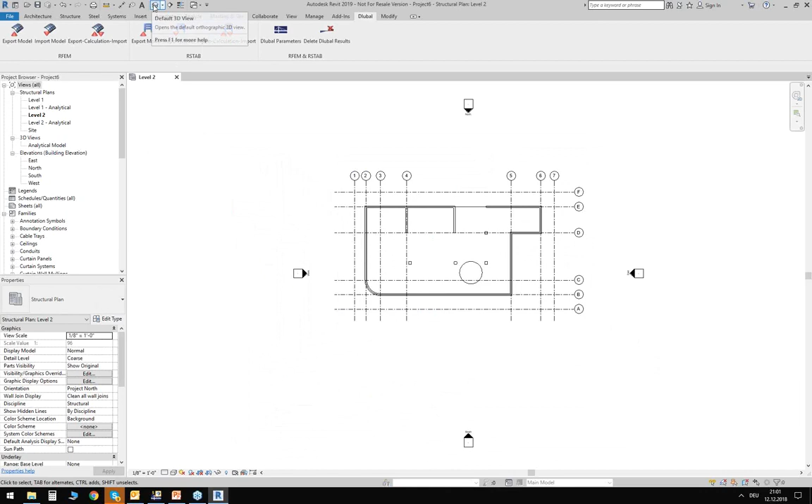Okay, import succeeded. I can close this window, and I can take a look at my 3D view in Revit. Maybe change the visibility mode here into the shaded mode. And you can see we were able to import a structure which looks quite good. We have here the sloped roof, we have the openings everywhere, and so on. So we were able to import a physical model from the analytical model in RFEM. Of course, we were also able to import the analytical model as well.

But the big benefit here is that we get the physical model in Revit. And this is now something the architect can work on. He can adapt it. He can maybe even export it into different formats to exchange it again via IFC, via STEP, whatsoever. So it's really a big benefit, this third scenario, that you can create models in Revit from the data in RFEM. So this was most likely the content that I wanted to show you. I hope I was able to show you some new or interesting features.